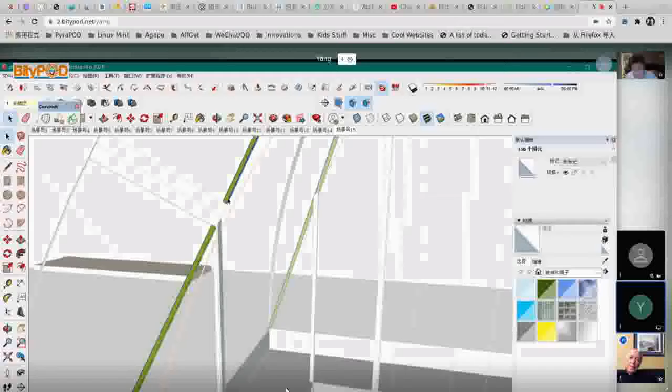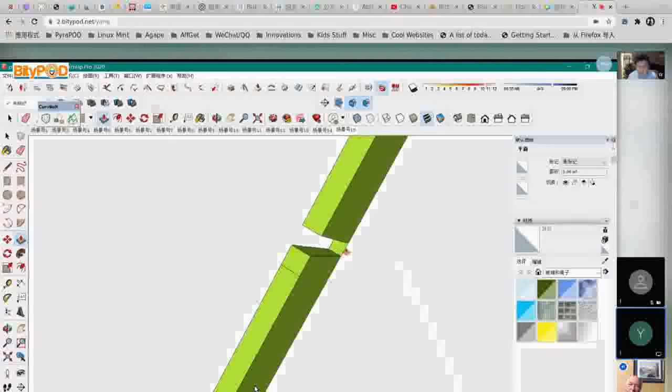So it's going to be cut into 2 pieces. From right at the where they come up, they're going to fit into the channel, right? So they don't pass through the channel, we pull it back so it doesn't even go through the channel. Of course, it just bends instead. So it'll be the thickness of the channel on each side, 3/16, that we're taking away, and then we're going to bend them 90 degrees, make a 90-degree like a hook. Yep, and that's going to come up into the channel, nest into the channel.

Yep, that's it, that's it. Make it 3 inches, maybe about 3 inches long. So we got that, and yes, it's the same up there, same idea.

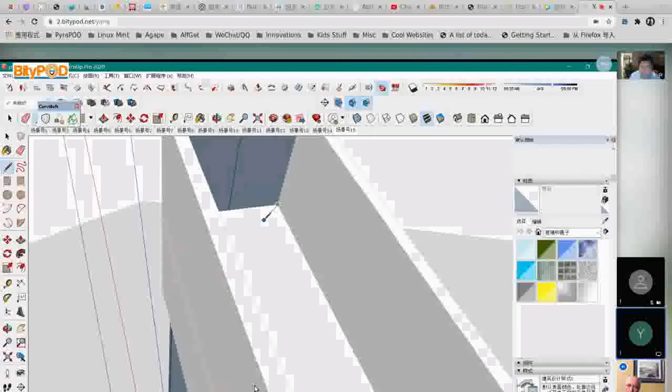Yeah, that'll be 6/16. It's gone.

So this is more fabrication on the truss.

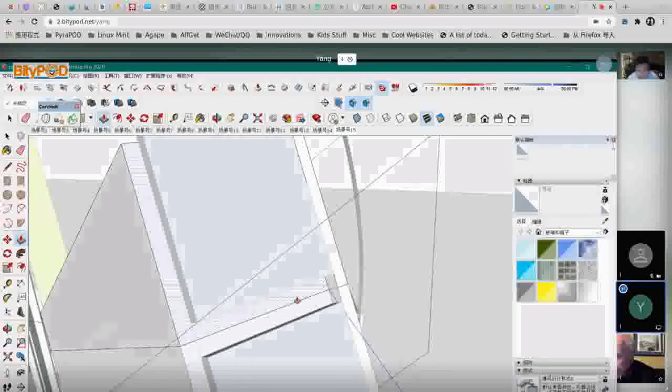Good morning, good morning, yeah sorry, I was trying to move videos to Rumble. Morning Aubrey, good morning, morning. Yeah, trying to move videos. We don't hear you. Oh sorry, I muted. I muted, I was trying to move videos to Rumble. Oh, okay, yeah it's a new platform. So okay, yeah, uh-huh. All right, right, that looks good, looks good, looks interesting, I wonder. Right.

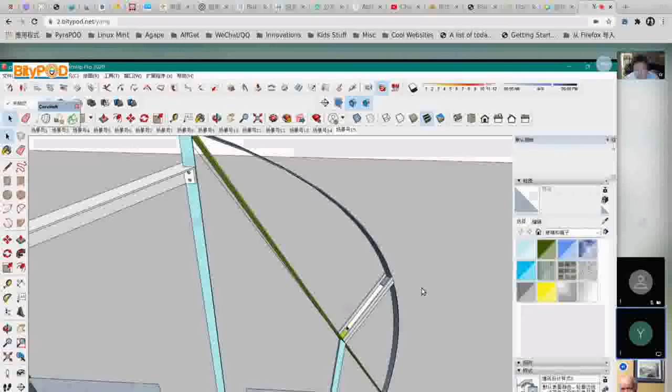Now, one of those channels, so now we need a connection to our column, right? And one of those channels could extend, like let's say the bottom one, you see, because it can extend, right? It's not interfering with anything. So what if we push it down, like extend it towards the column? Extend the channel. Yeah, extend the channel, because we're going to—I think we have to change a little bit here. We need a new connection, and I'm thinking about whether we use a channel for a column instead of the angle.

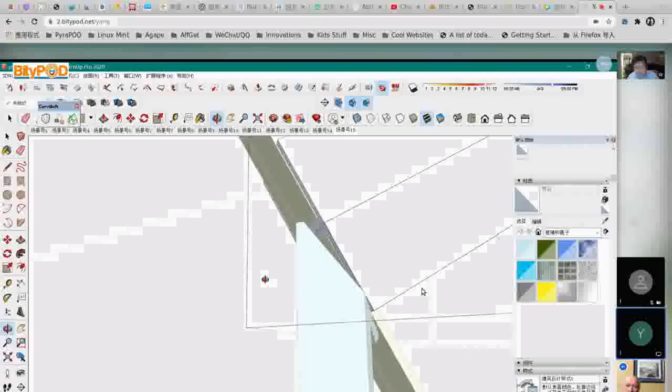You know, in some ways the angle is unusual, right? I mean to use an angle like that, it's a little bit—a channel is stronger than an L angle. So what if we just take that one, the bottom one, and extend it, push it through.

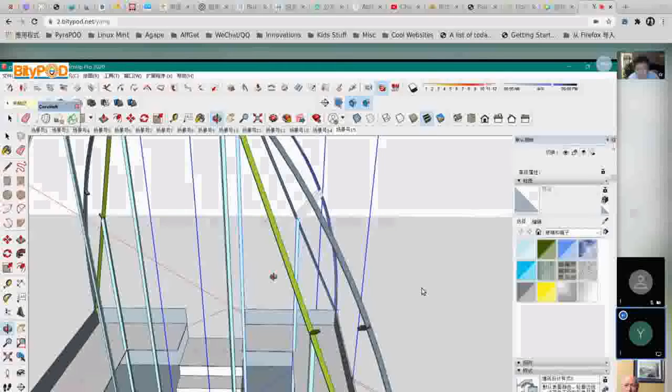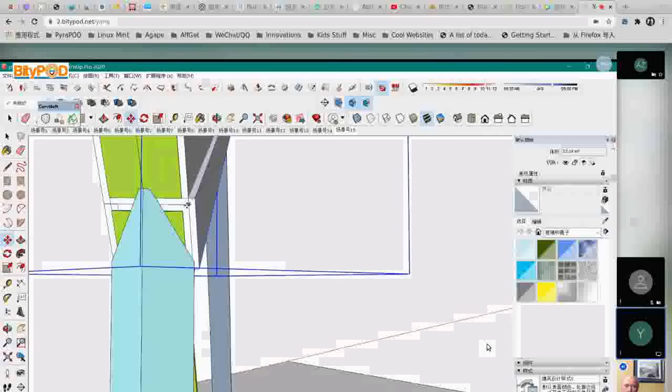So we use the channel just for instead of the—extrude it, lengthen it in this direction. Because then what we can do is make a connection to it. You see, and that's an advantage of breaking the flat bar, right? Is that we push that member through. So we're gonna just extrude it, extend it a longer, greater length.

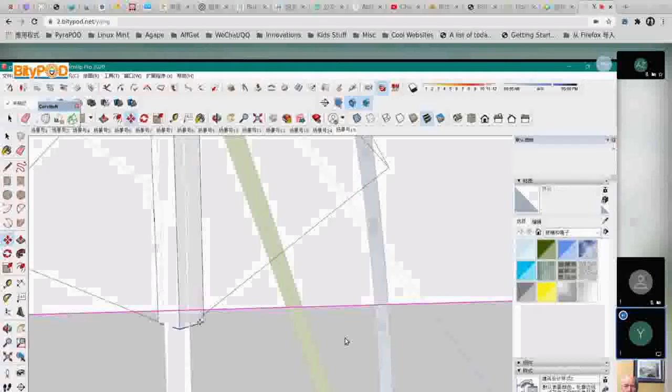The existing channel, right? We're not making a new piece or anything, it's just—okay. And you can turn it. Well, yeah, that's the idea, that's pretty much what I was thinking. Something like that. Yep. Yes, that's a way to do it, and that even could be fabricated like that as one piece.

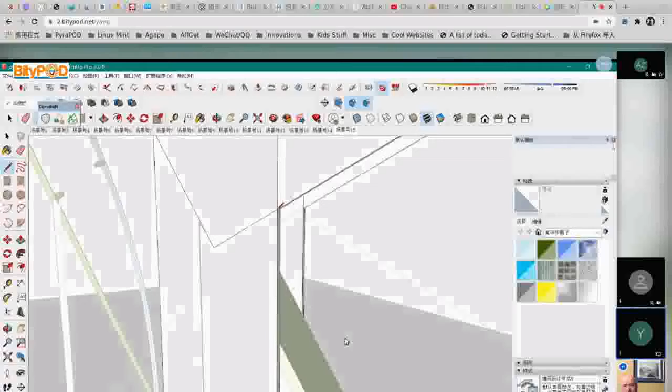And that would make quite a strong and simple column, a column with that arm, with that. Oh, you mean this could be one piece? Could be one piece, welded. Yeah, could be like we cut away the flanges and we bend it and weld it, make it as a one piece thing.

You know, that's more fabrication but more simplicity for the DIY. Yeah, this is for mass production. This is not to produce one, because this is a lot more work than our previous design, right? Our previous design is a simple design for DIY.

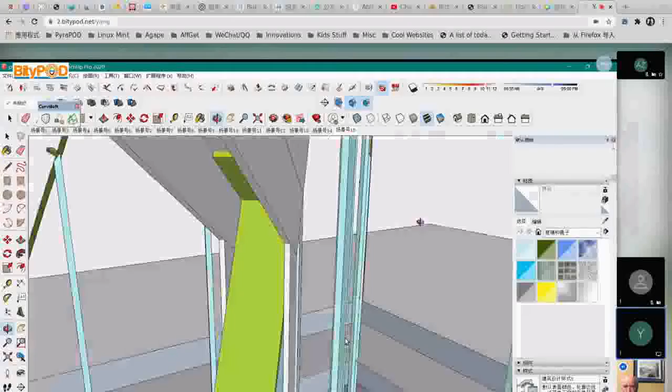Okay, well, what I'm talking about here is, yeah, you're not doing it the way I would do it. Okay, so here's what I would do. I like the principle of your idea there. So you just make one cutout 45 degrees to make a right angle bend. So you go back to the weld and do it a different way. Oh, you mean with a V cut, right? You cut out 90 degrees and you can make the bend. You just cut away on both sides of the channel. So the upper channel and the lower channel, they both have a cutout that allows—so yeah, just do a straight line through there, and you get the cutout from each channel.

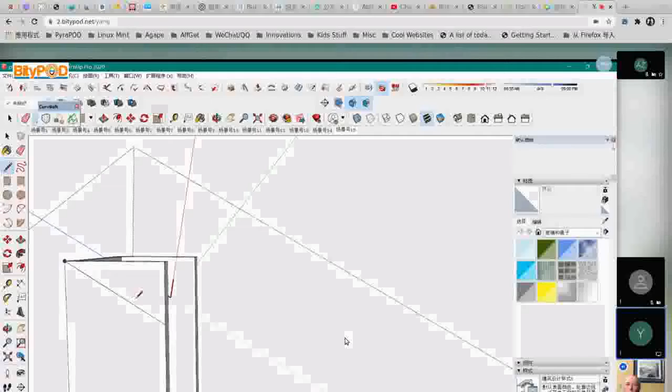And what we're doing is we don't cut the face of the channel. We just—see, that's too deep. So we don't cut right to the back of the channel, we just cut to the front of the channel, so that we can make a bend.

We're keeping the back of the channel in integrity, right? We're not breaking it. We're not cutting all the way through the back face, the face of the channel, just to the inside. See the cut? You did the cuts too deep.

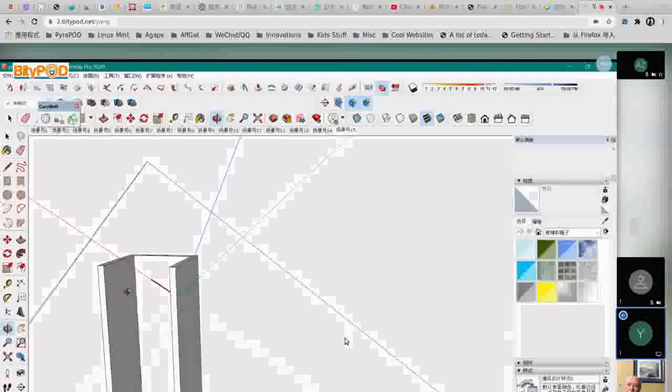Move the 45-degree cut to the front side of the channel, not the back. Front side. Because only the flange we need to cut away, not the face of the channel. Just the flange of the channel is what we're cutting away, so that we can bend it.

So the line simply stops before you get—see where it goes? You're missing the line for the inner face of the channel, because that's where the cut goes to and it stops. See this line? Yeah, do it on the inside of the channel, that's it, from the inside, a 45 degrees cut.

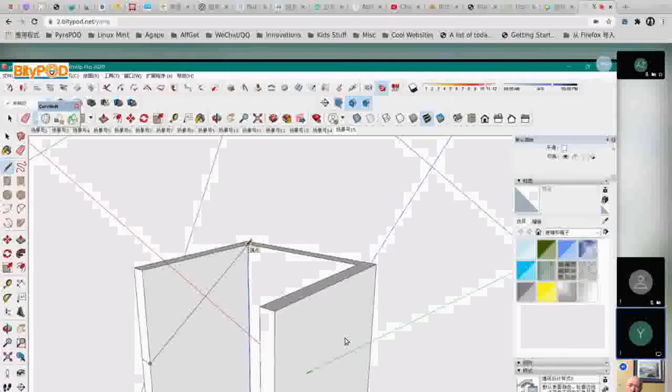And that'll take away enough from each, and then the other one, and you see it can be one piece, right? That's cut away, bent, and then welded.

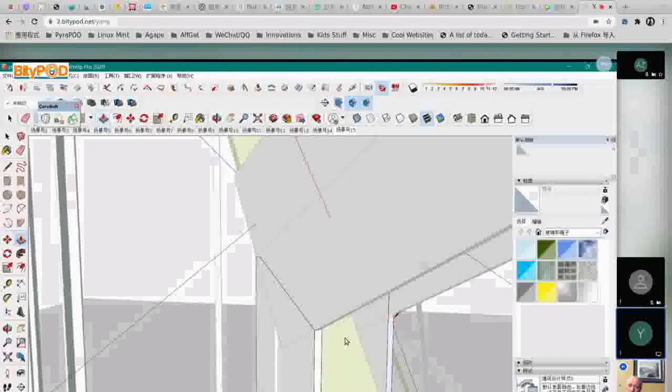So you do the cutaway of the arms there, of the flanges. Yep, that's the cutaway, and it's actually like this, you know. It's a 90-degree cutaway in the original work. Then you bend it, right? So the channel is straight. You do the cutaway, and then you bend it, and then you weld it.

So this will be one piece, right? There's not two pieces anymore. It's going to be a single piece that's cut away and then bent. So what I'm saying is the face is continuous, right?

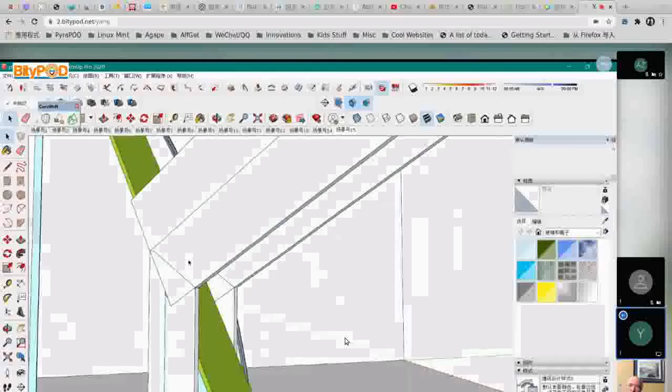Yeah, that's a real detail. People won't even see that, but we know, for fabrication purpose, parts, when you do the part drawing before the welding, is that this is a straight piece with a cutout, and then it's bent and welded. The back face is continuous there, no break.

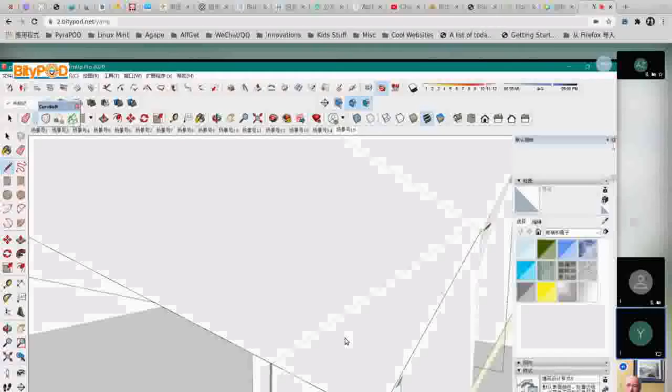This is the detail we can do, where we really see every part and can imagine the details, right, and get the details correct, so that when you go to fabricate, you're really just getting a result that is completely predictable.

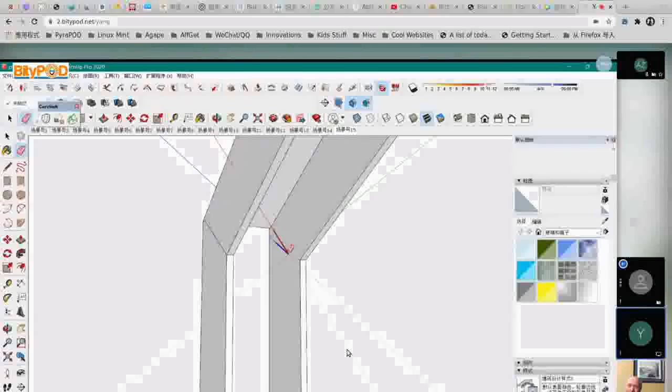Wow, is Yang actually a human, or is it artificial intelligence? It's so seamlessly responsive to your voice command. I know, it's like I'm imagining drawing. This is so fantastic, it so seamlessly executes. Wow, it's like the machine's talking.

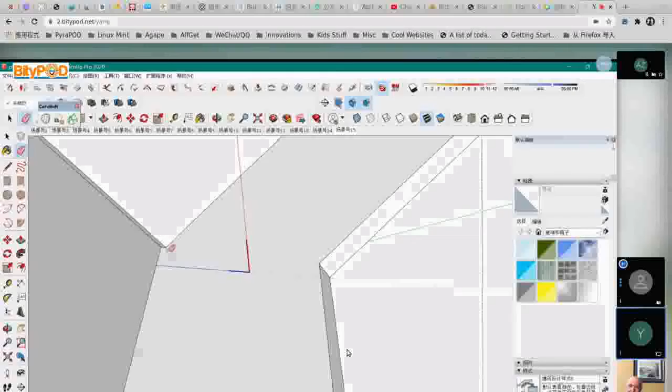Yeah, it's a lot of fun working with Yang. And yes, it's fascinating how quickly he translates the command into an actual effect. Yang is an architect too. As we were working together more and more, he's anticipating and getting a lot of contribution, so it even goes quicker.

You don't even say—huh? What you say? What do you mean? Like none of that, just, this is what I'm aiming for, and he's like, yeah. Huh? What did you say?

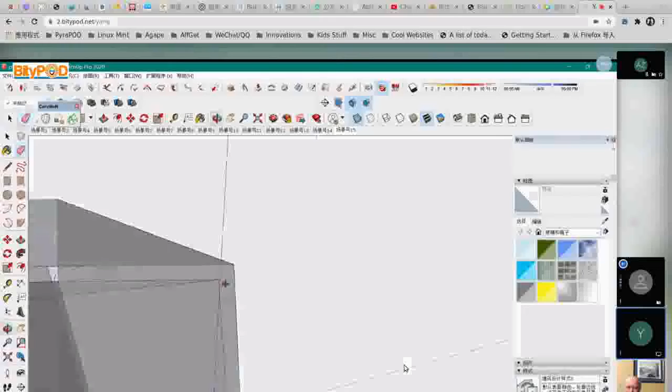So I appreciate the breakthrough of these drawings. And it gives confidence that he can follow the drawings now in his own fabrication process when he is ready to kick in. So it's definitely beneficial on my side seeing that piece of the puzzle fall in line.

And maybe have a chance we can regroup about it, just see the rest of the rollout on the business side. But yeah, I appreciate the work that's been done to get these master drawings in place. Yes, all right.

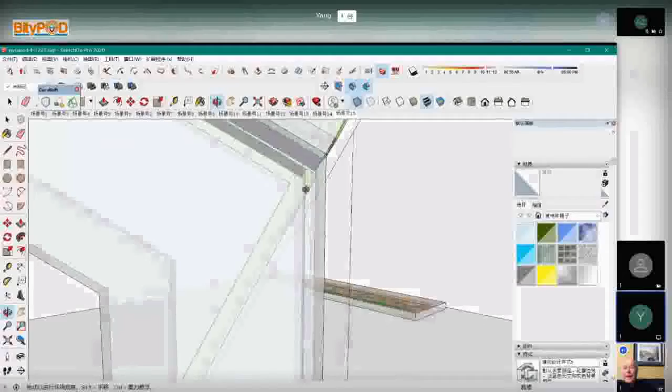This is replicable, and we can count on the results. And the beauty of this is now kind of a seamless learning and playing.

So see, when we look at the top, let's look at the pyramid at the top here. At the top, that is the bubble box. And after we do this design session, we're going to be able to make this bubble box as a kit, right, that people can go seamlessly build—the top part with a short leg, and then they can build the tower, the shower.

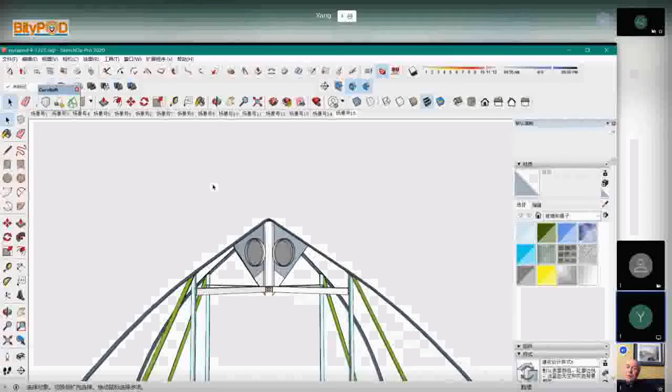Step by step, playfully, with minimum expenditure, people can learn about bubbles and have fun with bubbles, then go right into the application of the bubble technology. So they can start with the bubble box at the top, then they build the tower, then they add the arches, the bow arches.

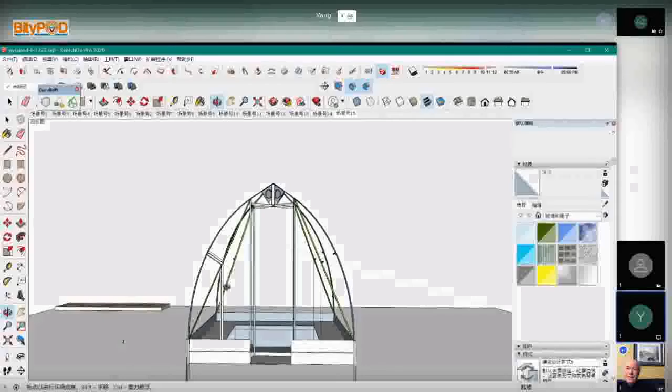And all the while they're learning advanced concepts, significant technological advancements. You call these arches here a bow arch. Do you see why? Like an arrow, bow and arrow. That vertical there, the channels are the arrow, and they work in compression.

And the string is the straight one. And the flat bar that goes into the curvature, again, it's natural, right? We're flexing because the flat bar will flex. It'll take the shape naturally, so there's no problem.

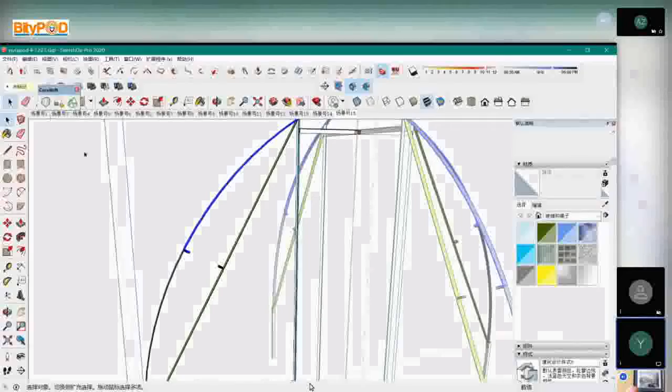It's so simple, and all the materials are very inexpensive. So we're using the materials at its highest possible outcome. Even these details I'm doing today, we can probably simplify them. We're going to have some reiteration, think about it, and say we could make that even simpler. Let's try this, let's try that. So we can get to tweaking the design, getting it as simple and low cost as we can make it, so that everyone can do it.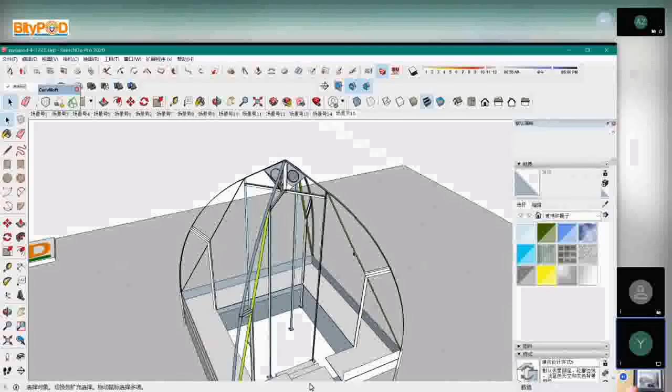This is the kit, the DIY kit. It's 14 by 14 feet at the base there, and it's about 16 feet high.

The columns at this design - now the columns for the tower, like for the shower, they don't need to be 16 feet. They could be 8 feet, or they could be 6 feet for kids. That's how we could go step by step, and people would be able to explore, have fun, and then apply their knowledge.

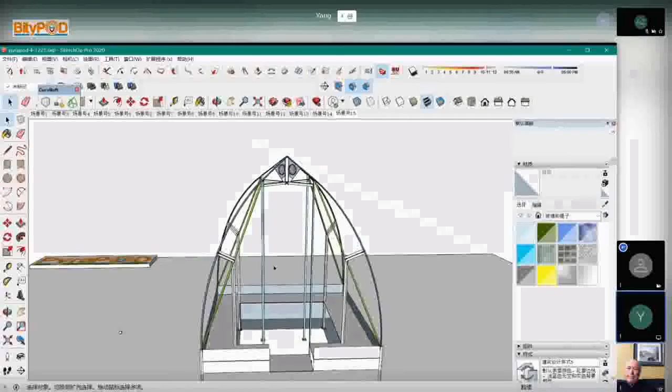So bubble fun should be doable. We should have lots of people saying, yeah, I'll buy the kit, I'll get the kit. Someone's going to be able to fabricate the kit, and we'll see if they can fabricate locally. And if not, they can just order one.

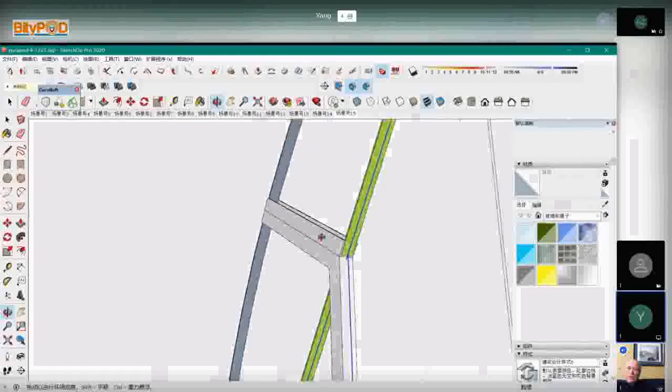Now see the top of that column? That's a work of art, how it's going together, all the flat bar and the assembly. I think it's beautiful. So there are two bolt holes, maybe there are two. It's really great - it's a very good consumer product.

It's easy to put together, it's not challenging. Oh yeah, this is fantastic. And see, it's going to be a very rigid table when you put it together, and then all you need to do is put a cover over it and put the bubble machine in, and you've got a bubble box.

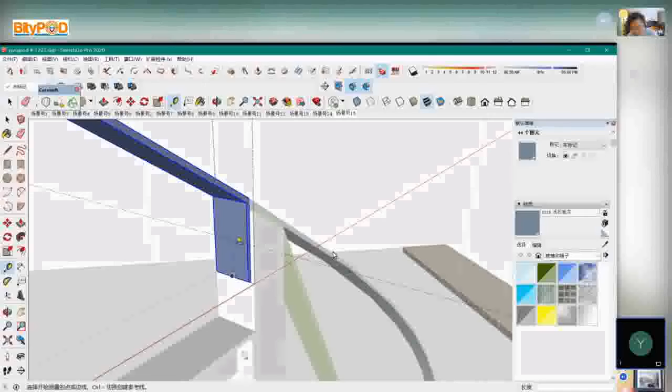And you put a short leg, so our leg there, instead of being a column, it's just going to be a leg of the bubble box. And see the bolts that go into the channel - the head of the bolt is inside the channel, and the nuts are here on the outside. Easy to tighten them up, easy to assemble.

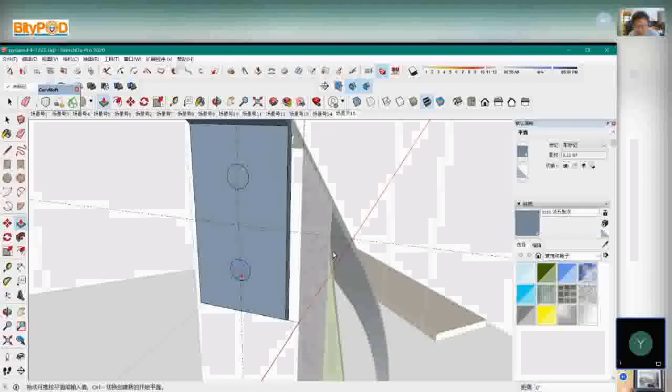The head of the bolt on the top of the flat bar needs to go into the channel - the top one - so we can have a nice smooth surface. We need to retain the smoothness of the top side of the flat bar. Okay, so that's a full size bubble box.

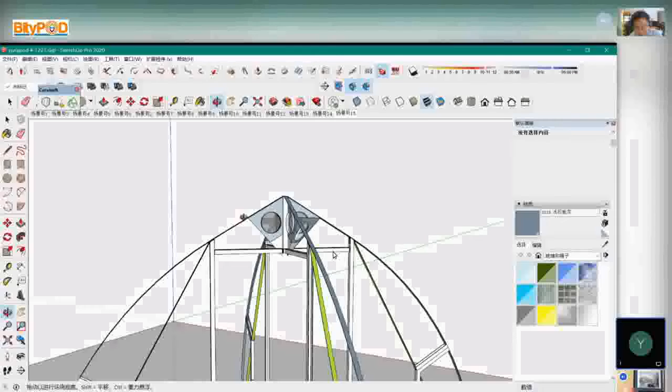Every piece is useful for the next step. You can do a bubble shower. You can start with one bubble machine, then do two if you want - especially if you're going to do a Pyrapod. If you're actually going to do the Pyrapod 4, you could get both bubble machines, or you could get one. You can still play around with the bubbles with one machine.

This is a consumer kit. I really think so - I can imagine myself hiring a contractor and saying, I want to put this up in my backyard. I can see it being done easily.

Well, I think that's enough for today, probably, huh? Yeah, that's good. Wow.

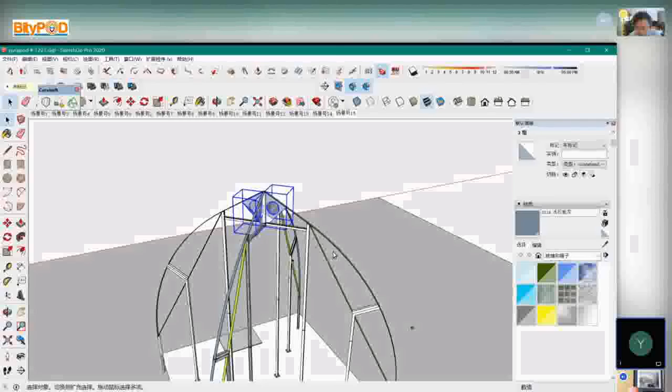Wonderful. So this part is the core. There's going to be a little bit of difference in how we put in the bubble box with this frame, right? So now we adapt our concept of bubble box to working with this frame, the housing, especially the housing of the bubble box.

So when we delete this part, that's the bubble shower. There's the shower, with short legs. Short legs, there's the bubble box. And look, half of the long column, half of the column is the bubble shower, 8 feet high. And then you just add, and then you just go higher when you do the whole thing.

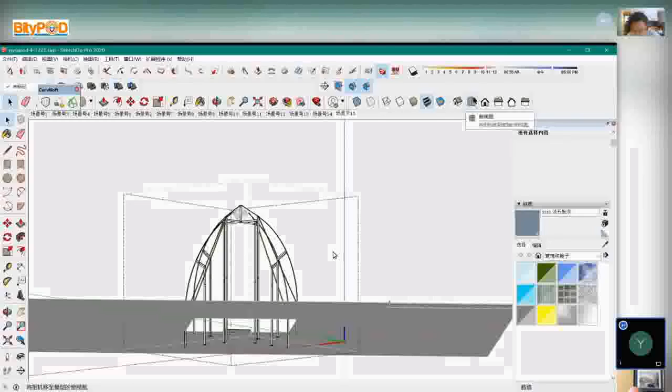Very interesting. There might even be like a small tent. Can you see where we break it at the 8 foot? Imagine putting a ground level at 8 feet and still use the upper Pyrapod components. You get a smaller tent. See, if you put a grade at 8 feet, a plane, like here, like there, right?

That's a small tent. And it doesn't need to go like so. It's just the upper part of the arch, not the whole arch. Just the upper part of the arch. And again, from here, you use the parts above that point, but the parts below can be added when you want to. So we have another product, which is a tent that's 8 foot high, not 16, 8 foot.

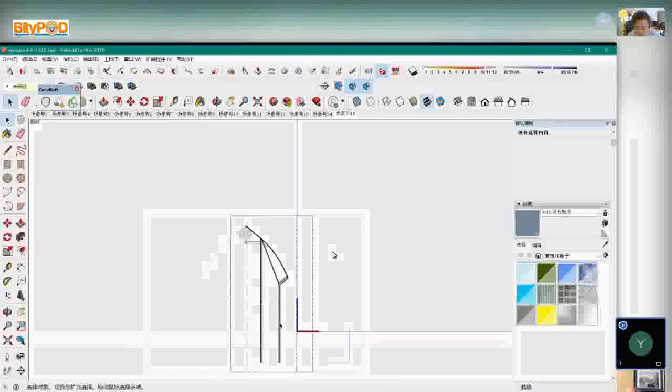See, a tiny tent, a tiny tent, then right? I like it, wow. This is beautiful. It's beautiful, like a mushroom. A mushroom.

I see something here that's quite significant. Oh yeah, got it. We can do that. We can make them for children. We can make them a little bubble, with no lift, with no complication. You can play inside it, you can grow food inside it, you can just have fun. And the bubbles, of course, are contained in a wall cavity. So that would be the next step, to experience getting bubbles into a wall cavity, right? A roof cavity.

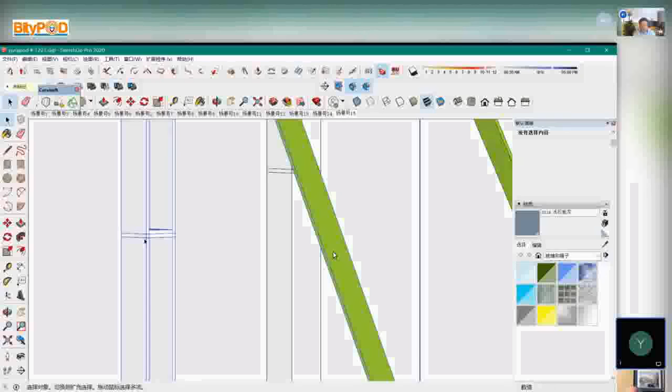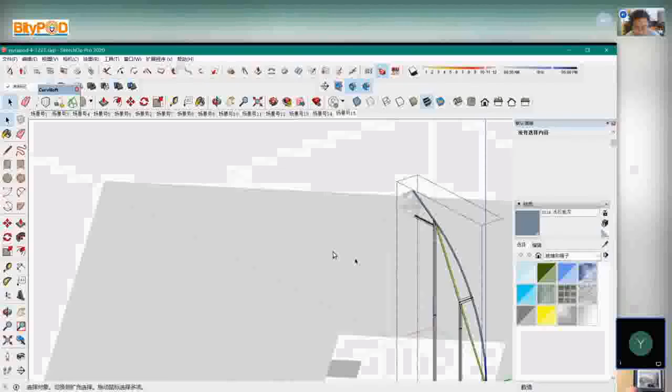Oh wow, that's just beautiful. It's a mushroom. Mushroom, yeah, right, it is a mushroom. This is the beauty of the sacred geometry, right? Of what we're working with. It's automatically, it seems to reveal more and more of its potentials.

Yeah, that's awesome. All right. This is like a whole new series of products. We got the bubble box, we got the bubble tent, the mushroom tent. Yeah, we've got the bubble shower, right? Bubble shower, and then we've got the full size Pyrapod 4. That's right.

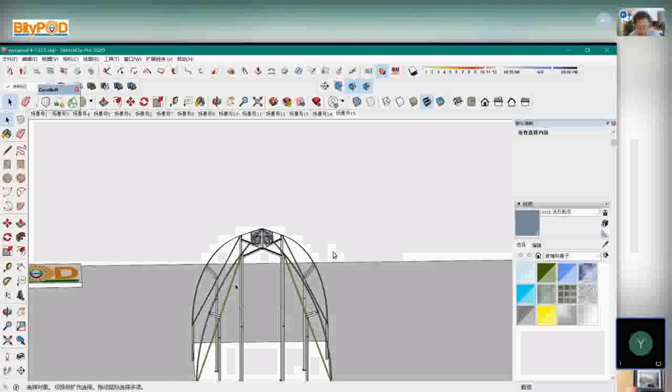And when we invite people to bubble fun, they can go all the way through that progression and have a lot of fun, learn a lot, and grow food, and learn about the solar aspect, right? Because the children are playing in that tent in the hot summer, it'll be nice and cool there.

It'll be nice and cool, like a little igloo, they can go. Or in the winter, they go out there and say, 'Oh, I'm in my little play bubble mushroom,' and it'll be fun and interesting and active, right? Sort of activity. It's good for them.

Nice. Yeah. Wow, whoa. Yeah, that's fantastic. So yeah, we can go all the way.

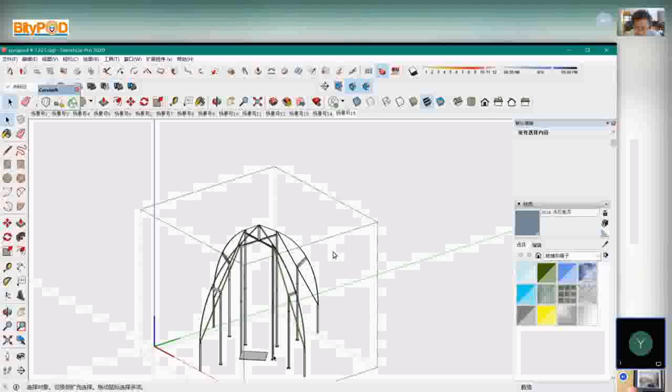We can look at what we have interior when we cut it at the mushroom tent size. You see, it's so integrated, right? All the products are totally integrated. From a small thing you can do in a classroom to a full size building in the schoolyard. So this is the one to talk with the school about. Playful.

Oh, I tell you, I am so happy. This is a Christmas gift to the world. Yes. And the structure is better, the structure is so beautiful. Simple, elegant.

Wow. Yeah, we definitely got something here.